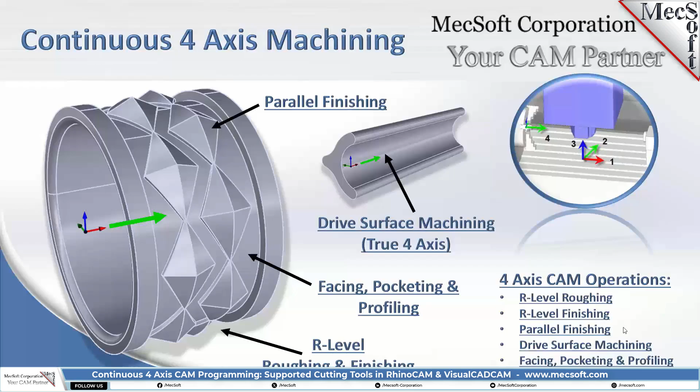These are the operations we're going to be demonstrating: R-level roughing, R-level finishing—R-level meaning each cut level is a radius, so it's going to be working its way down at various radii on the part. We're also going to be looking at parallel finishing in 4-axis, and we mentioned drive surface machining, which we'll show on another part. Then facing, pocketing, and profiling.

So for tools, we really didn't mention our cutting tools, so let's just go into the tools here. There's no real special criteria for your cutting tools other than that you have a subset of tools that you can use in 4-axis.

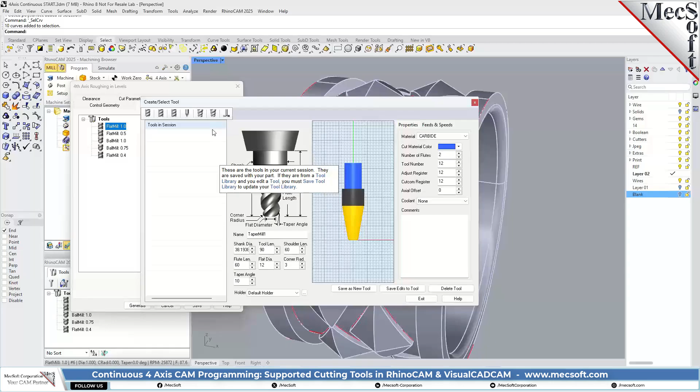The tools are basically defined the same. We have ball mills, flat mills. We're not going to be using a corner radius mill, a V mill, the chamfer, or the tapered mill. Now in small parts like this in jewelry, you probably will be using a tapered mill—just be aware that takes a little longer to calculate the toolpath using a taper. But we're just going to be using ball mills.

Okay, so for the roughing in levels, we're going to be using the 1-millimeter flat end mill right at the top. We're not going to be looking at the feeds and speeds nor the clearance—go straight to the cut parameters. We're having an in-tolerance and out-tolerance of 1/4 of a millimeter, and we're leaving 0.2 millimeters of stock on the part.

And we're using a cut pattern, a stock offset, and a mixed cut direction. And we're using a 10% step over for each cut level.

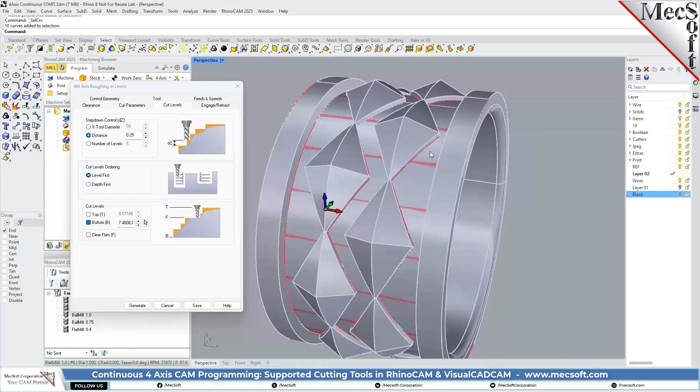For the cut level tab, our step down is set to 1/4 of a millimeter, and we're doing levels first—so it's going to go do one level and then the next level and then the next. We do have a bottom set, which is actually the bottom of these diamonds right here. And for engage and retract, we just do a straight linear retract.

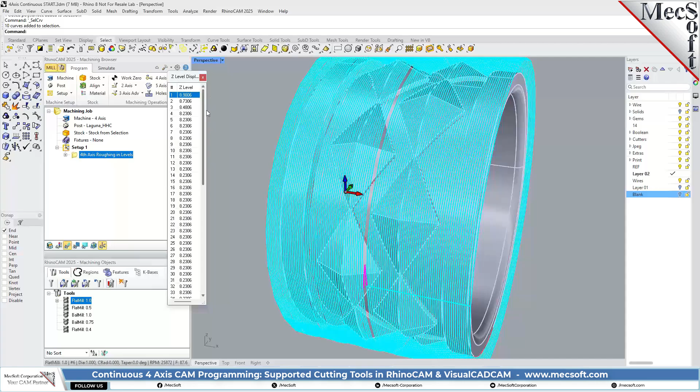Let's generate this—you see that was pretty fast. Let's look at this in levels here. Now you see that we have a number of levels; we'll just work our way down. If you're familiar with 3-axis horizontal roughing, it's similar, but you'll see that the levels are radii.

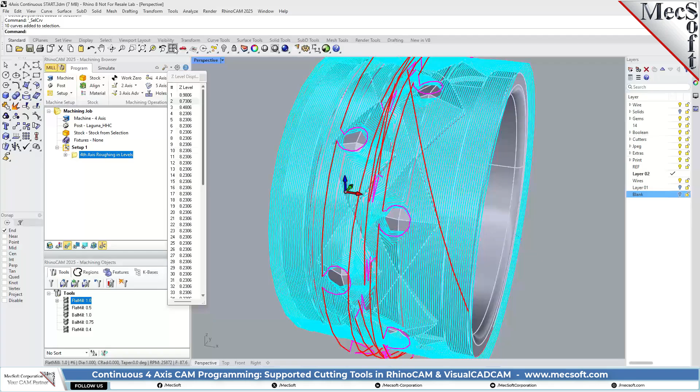I'm going a little bit slower on this part because it runs pretty fast, so we got plenty of time. Let's go here and look at our cut levels, and we'll just go down. So it's basically similar to 3-axis, but the cut levels are radiuses, and we're working our way down here in different areas.

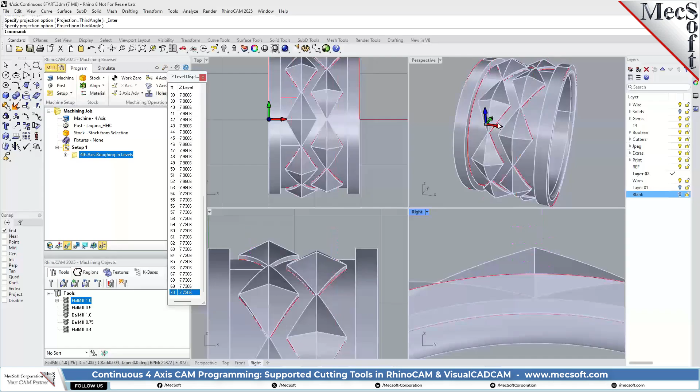Okay, so let's go ahead and go back up here and let's simulate this. We'll turn the toolpath off, and what we're going to do is set colors in simulation. You set that here—we'll set it to MOP, which stands for machining operation. We're going to set our color from the properties tab to the same as our stock color. Let's go ahead and play that.

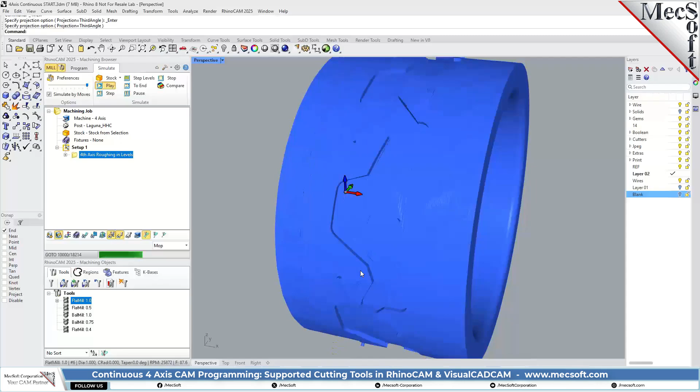So you'll see that the tool is working its way down in levels, and when it gets to the part features, it's doing an offset.

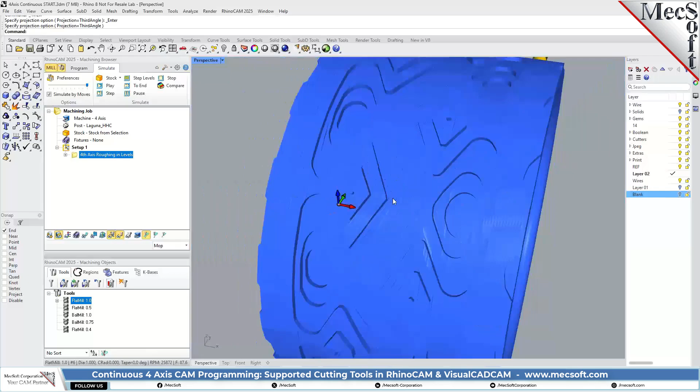Okay, so you'll see that it did a really nice roughing in levels, worked its way down. We had our cut level set pretty high. For this part, you would probably tighten it up some, because if you're cutting gold, your tool is probably a diamond tip tool, and you may want to only be cutting a thin layer at a time. But that's horizontal roughing in levels.